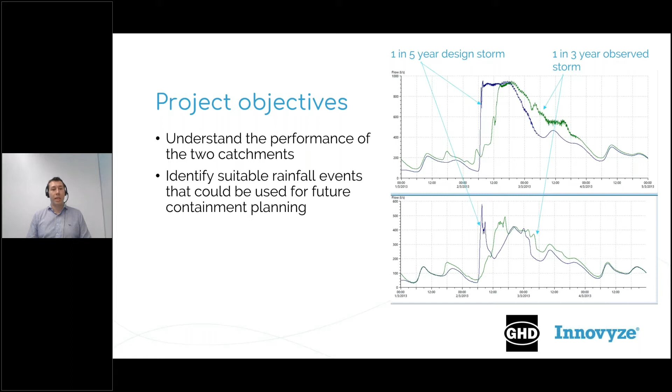And then secondly, we want to be able to identify suitable rainfall events that we can use for future containment planning. So that's like the master planning. So instead of using design storms, we can use real recorded storms that give a certain level of spilling and design our containment to those. Next.

So really at the core is the long time series model. The long time series is really the rainfall. And so what we were given for Brisbane was 30 years of rainfall data that Brisbane City Council had collected. At the outset of the project, we decided roughly 10 years would be a representative timeframe. So we looked at this data in the first 10 years of the 30-year record.

There weren't very many monitors operating. The data was quite sporadic, lots of drops, so we kind of had to discount that. The next 10 years was the millennium drought, so it's probably not that appropriate to run and test overflows against. So really that left us with the last 10 years, which was the period of 2008 to end of 2017.

And we analysed the rainfall across this 10-year period, and we pulled out each of the events. We did that using general thresholds, like a minimum of 10 mil in 12 hours, just to get all of the different events. And we decided that we would merge events that were in close proximity, say within 3 days of each other, into a single rainfall event.

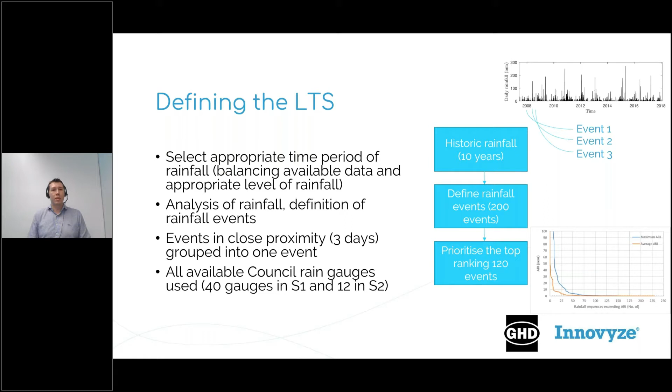So the process. What we're doing is we're relying on a calibrated hydraulic model. These models were calibrated to temporary flow data and temporary rainfall data. The calibration is about 3 years old. And what we did was we took those rainfall events that we just defined, and there were 120 of them, and we ran 120 simulations.

And we started each one up manually, as shown in the figure. And all of the initial conditions, so the groundwater, was set specific to the start of each rainfall event, obviously using the preceding rainfall event.

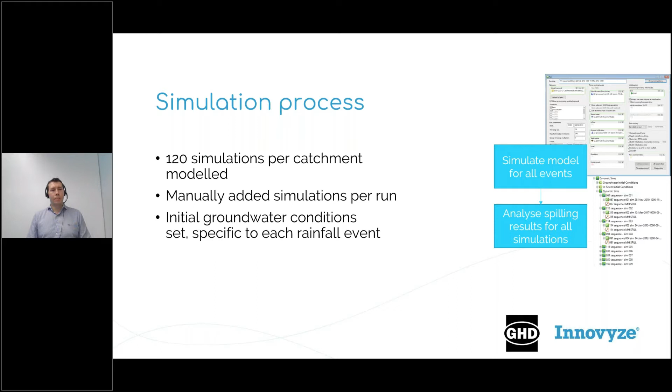So now that we've run the simulations, we've got results. The first thing to note is that for the S1 catchment, there was about 1 terabyte of result files and 0.5 terabyte for the S2 catchment. So firstly, what we can do is look at all of the assets that spill at any point over those 120 simulations. For the S1 catchment, it's about 650, and 530 for the S2 catchment.

And we excluded the small reticulation because when running large ARI rainfall events, it's not the most practical thing to include the reticulation. So with the results, we analysed it in 2 ways. We had the frequency of overflow per asset, and secondly, we had the ranking of the overflow that occurred over the whole catchment for a set period of time.

So the first piece of analysis is shown in the two images to the right. The top one, I've just pulled out an example asset. Each point on that graph in the top represents a spill. And they have various volumes of spilling and they occur at various times. So over the 10 years, which is our representative rainfall time period, this asset spilt 85 times.

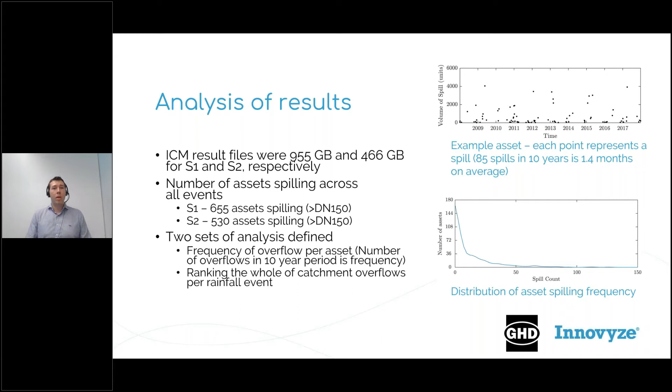So staying on this idea of how frequently assets actually spill, we can use that information to inform operations and get an idea of how the network performs. Next slide. So what we did is we calculated what the spill frequency was for every single asset and put it on a catchment map. And we put the sewer network pipes in the background, and it highlights where the really frequent spills are, where the points on the network that spill are.

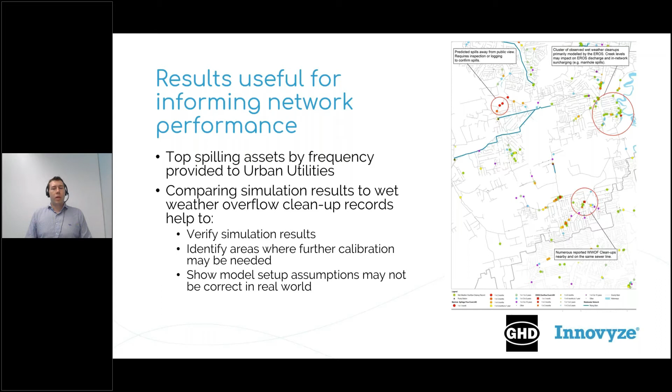So returning back to the second objective about choosing rainfall events for possible inclusion in master planning and containment simulations. What we had was the 120 simulations of data, and we can see all the spills that occur in them. Now, because some of these rainfall events are quite long and really include multiple rain bursts that create multiple overflow events, what we've done is we've taken those simulation results and we've split out the overflow events from within them.

And so the figure in the top right just gives an indication that was one simulation, but there are 2 rainfall events and 2 spills. So that's the hatched area. So we went through and did that for all 120 simulations, and obviously the number of overflow events was slightly more. And it's important to note that the time that this applies to is consistent over the whole network for an overflow event. So we're no longer looking at individual assets, we're looking at what happens at the network level.

And so what this does is, if we do that and we take the volume of spill from the entire network over that time range, we get a table, and we can rank that table. Largest spilling volume from the network as rank 1, and then descending down. And that's what the bottom figure shows us.

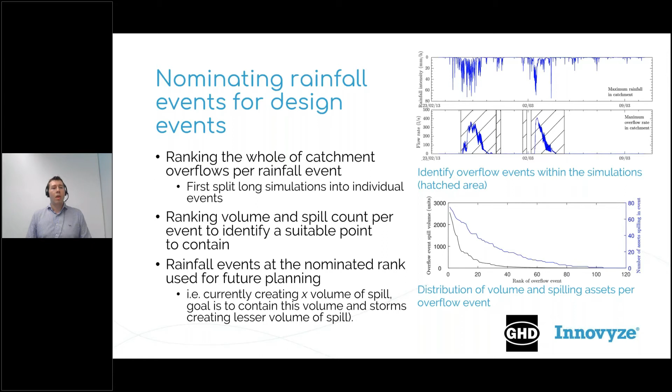So how we use this information. In the table down the bottom, I've just pulled out some representative rainfall events and the overflow event. So at the 3-month spill ARI, or the 40th ranked overflow event by volume, there's about 6,000 cubic meters spilling, and the rainfall depth is about 65 millimeters, and it's a half a year ARI, so 1 in 6 month rainfall ARI that's generating that volume of spill. And we've got different statistics for different spill recurrences.

And it's quite interesting to note the box plot in the top right hand corner. So these overflow ranks, we've ranked them, but the spatial distribution and the temporal distribution of the rainfall can be different because we're using real historic rainfall. We don't want to limit it down to one rainfall event. So we select a few either side. So for the 40th ranked event, we might select from rank 43 down to 37 and look at those rainfall events.

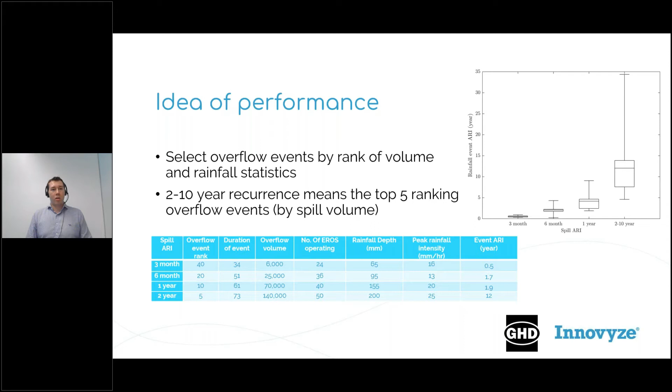Thanks, Nick. We've got some questions coming in, so we'll just take a couple minutes to answer the first couple questions. Nick, do you have a list of all the ARIs against all the rainfall events? Yep. So as part of the first part of this project, looking at all the events for the rainfall and splitting them out in terms of time, we calculated various statistics, and that included the ARI of the rainfall. And we did that for every single monitor as well, because obviously there's more than just one rain gauge within an event.

Okay, great. In terms of frequency and volume of spills, how do you compare the time series results from AR&R 87 to AR&R 2019? Do you have that off the top of your head? So we did not do that as part of this project. I did a small test just for fun, and at least in the response, it looks similar. But I haven't gone into it in enough depth to say.

Okay. One more. What assumptions and setup did you assume for boundary conditions and pump station operations? Yeah, so we purposefully made the decision at the outset of the project to run the calibrated model with, I guess, ideal conditions. Some of the pump stations are operator controlled in wet weather events, and they do funny things. So we made the decision that we would run it as it was designed to be run. And the idea there is if our model predicts X amount of spill, then if they run it in a less efficient way, it's only going to be worse. So it kind of gives the justification to fix other stuff first and then look at the network results.

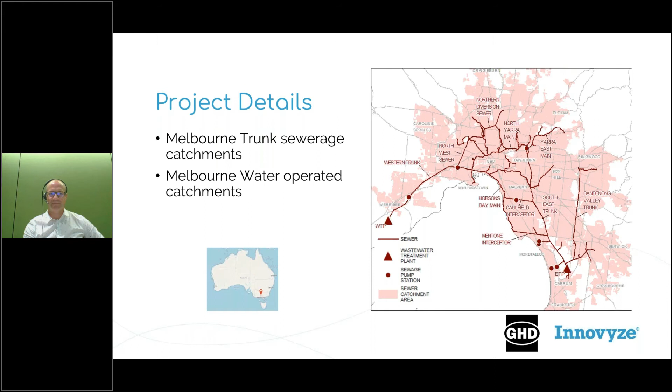So the objective of the project was to produce an events-based analysis and compare that with the time series that we're doing here. And the outputs of that would be to compare the treatment plant wet weather inflows with the event-based flows, and also the spill points and the spill volumes that we get throughout the system. Next.

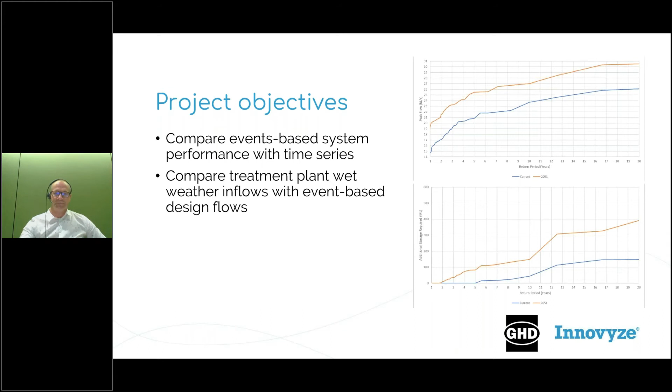So to define our long-term time series, we wanted to use 50 years worth of data, so going back to 1960. As Nick highlighted up in Brisbane, the older data wasn't quite as good. So we used Bureau of Meteorology daily records dating back to the 60s, and then Melbourne Water had records going back approximately 30 years. And so the data series was produced to generate 30-minute time steps for the data going back to the 1960s.

So there was data processing done on the information available from the combination of the Bureau gauges and the Melbourne Water gauges, and then the data from the Bureau records created 1,020 grid points across that Melbourne network. So if you've got 50 years of data with 1,020 grid points with half-hour intervals, you've got nearly 900 million data points.

So that was used for the system assessment, and then to apply the hydrology, we just used daily rainfall and evaporation, which was just on a daily process. So we used that as a single rainfall file within the model, whereas for the individual years we did 1 year at a time across the different decades. All right, next slide.

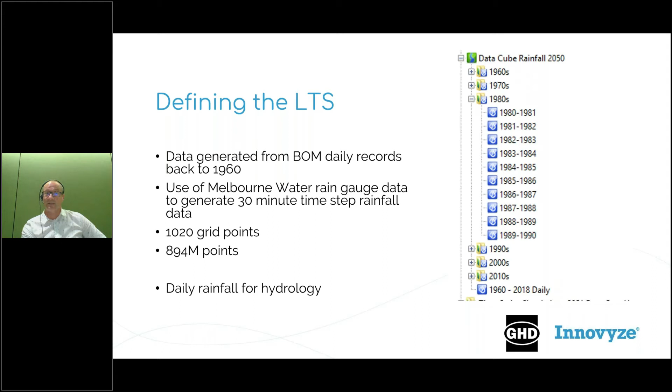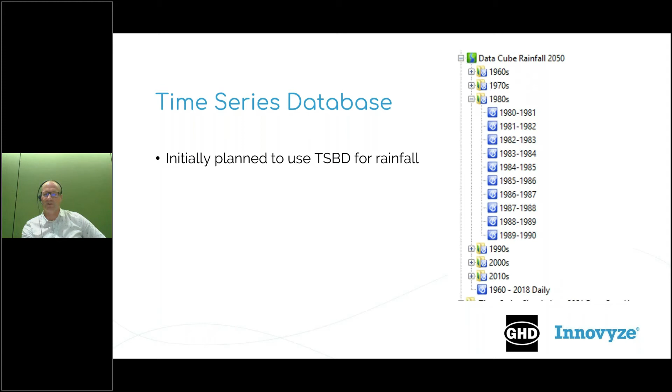So this was done a couple of years ago. We'd initially planned to use the time series database for all of this data, but at the time we couldn't quite get it to work as we'd wanted it to, and so we abandoned that idea and went with the more traditional importation of the rainfall files. Next.

Just back one. So we put the rainfall files in. As I mentioned earlier, there were 1,020 rainfall profiles, and so we needed to manually assign them to the subcatchments that we had within the model, and ditto with the evaporation profiles, of which we had about 6. And so that was the rainfall input into the model, and then we go to the next slide.

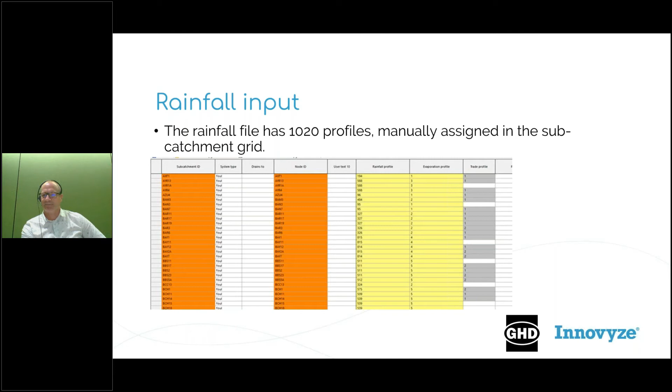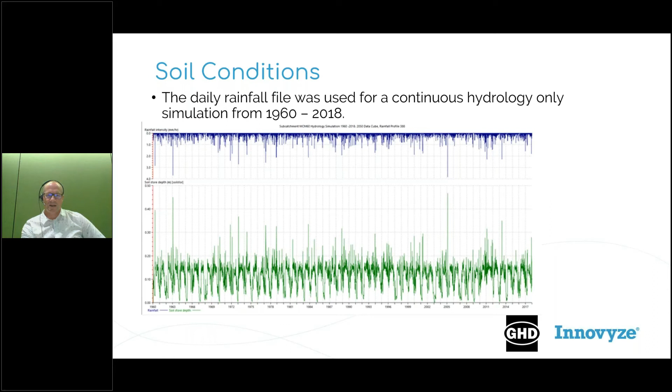And so to get our initial groundwater condition, we ran the daily rainfall file from 1960 to 2018 to generate the soil store depth throughout that whole time series of almost 50 years for each of the subcatchments, and then used that as the initial condition for each of the rainfall events that we used. Next.

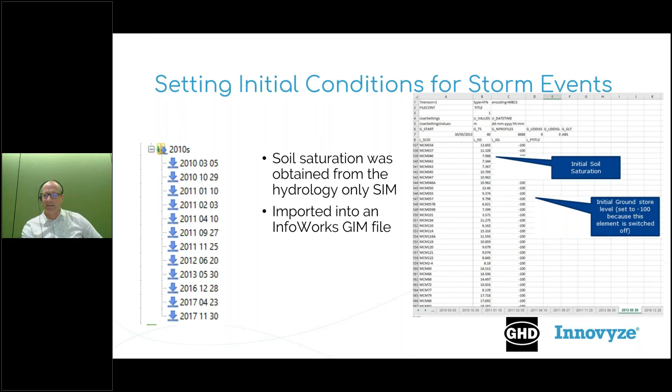And so the soil saturation, as I mentioned before, we used that 50-year hydrology file, and we went to the start point of each of the events that we wanted to look at. We extracted the results, processed the data, and then imported it into an InfoWorks groundwater infiltration module file for each of the events that we were going to look at. So that was the process that we used there. Obviously a lot of data processing, but it seemed to be the most efficient way at the time that we did it. Next.

And so in order to select the events, we had 50 years worth of data. And so initially we selected 70 events based on the rainfall depth from each event. So we thought we'd sort of start with that. So that was the starting point.

And for the 50 highest ranked events, spills were predicted at 2 of the known capacity constrained parts of the system. So that was the top 50 events from the 50 years, and then the next 20 events that we ran, spills were not predicted at those 2 known sites.

And so I think probably if you can crunch your numbers in your head, you'd probably sooner be walking along the creek in the rain in Melbourne than you would up in Brisbane. Next slide.

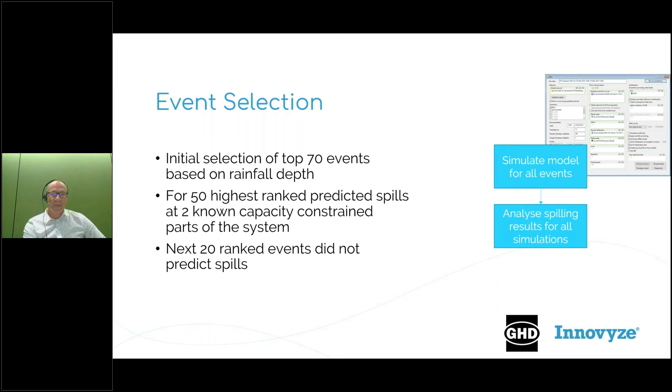And so then in order to check that data, we had a look at the last 25 years of ERS spill data, as well as the last 20 years of treatment plant inflow data for the 2 plants that operate in the Melbourne system. And what we found out was that there were some ERS spills that were not captured in those top 70 events. And so because of that, we changed our event selection criteria,

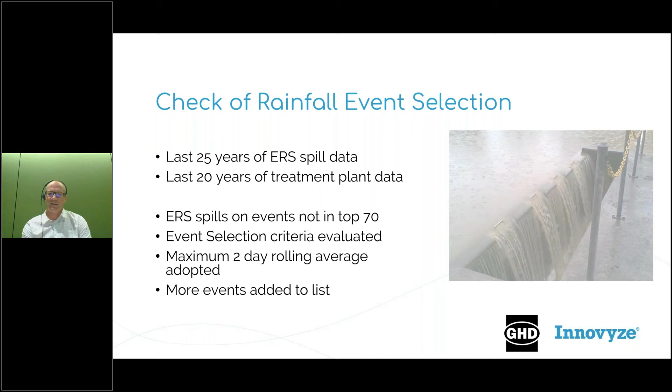because obviously there were some spills at some of the events that weren't on the highest amount of rain over the average of all the gauges that we had. And so we adopted a maximum 2-day rolling average for the rainfall depth across the gauges, and added some more events to the list. Next slide.

And so our criteria were to include our initial 70 largest events, and then because we had the ERS spill data for dates, we included those if they weren't already included in the top 70. We looked at the treatment plant inflows and got the peak flows from the top 30 events. And so if there were any high flow events at the treatment plants that weren't included in that top 70, we included those as well. And then any alternative storm that we identified, just as a sort of coverall.

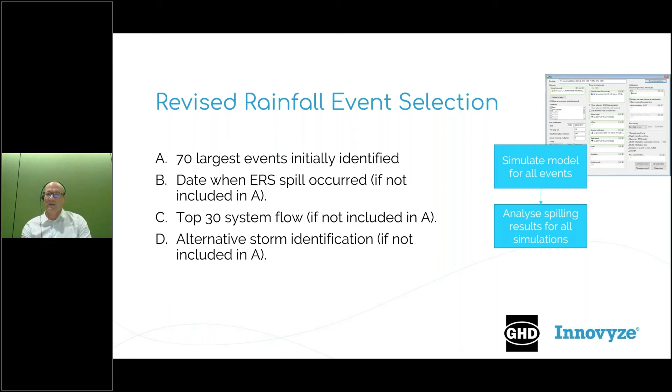So next slide. So we ended up with 92 events that we simulated. So we got those 92 events, and as I highlighted earlier, we generated 92 groundwater files, one for each of those, for the starting condition. And so we ran the events to analyze the spills.

So for each spill location, each storm was ranked based on the spill volume at each individual location, to determine the spill frequency and the spill volume with a 5-year return period, or a 1 in 5. And so in the example that we've got here, this location spilled for 12 events across the 50 years. So it gives a spill frequency of 4.17 years. And the spill volume with a 5-year return period is 66 kilolitres, which is the 10th one down there on the list.

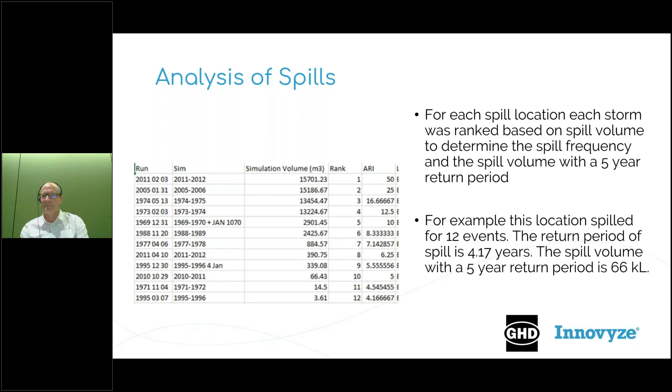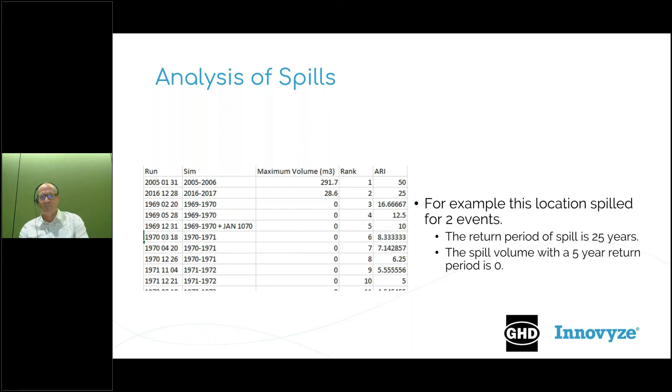So that was one point in the system that had spills and is known to have spills. Then we go to the next slide. And then an example of a second point within the system, which across the suite of storms that we looked at, this site spilled twice, so it's got a spill return period of 25 years, and therefore the spill volume with a 5-year return period is 0, which would be the 10th ranked storm across the suite. So we just go to the next slide.

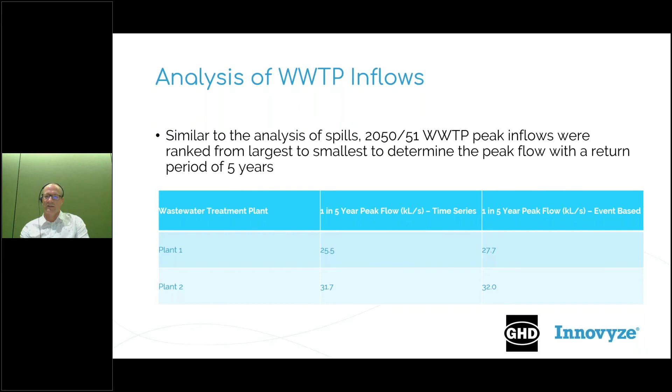All right, next slide. Yep, I think that's it. So that's a bit of a summary of quite a lot of work, and I've just given you a bit of a snapshot of what we did and what some of the outcomes were.

That's a substantial project. We've had a few more questions come in. Jonathan, could you explain the grid rainfall data method, and is it available for modeling like calibration? So the grid method. We didn't actually produce that grid method ourselves. That was done by others from the Bureau rainfall, and it was then processed down, as I mentioned earlier, from the daily records using some of the tipping bucket information to produce half-hourly intervals.

So I suppose a key thing to point out there is that when you're going down to only half-hour timing intervals on a smaller network, which includes your retic and stuff, your half-hour time increment might not be as appropriate to use for a shorter duration event. So there could be some limitations on that one. We didn't produce that data ourselves, so I don't know whether it would be available for general use, but I probably wouldn't use it as a starting point for calibration.

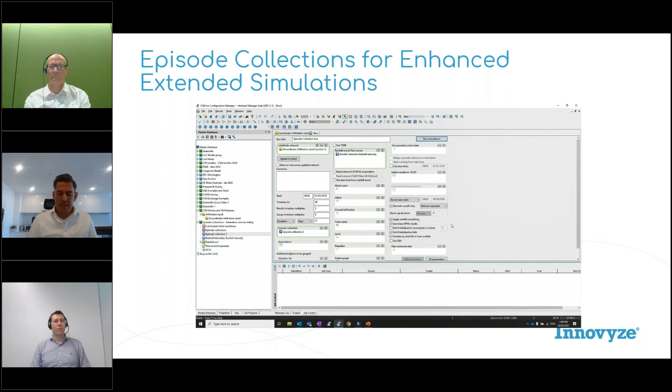So I'm going to close out of the episode collection, and we're going to create a new simulation. Call it episode collection simulation or run. Drag and drop your episode collection that we just created into your run group. And then pay attention over here. We adjust the simulate runoff only between episodes. So when you're simulating, the software is automatically going to differentiate the hydraulics from when you want runoff only between your particular events.

Kick off the simulation. This is occurring on my machine. As we know, we could use distributed computing to offload your sims to a high-spec server, which you'll want to do when you're crunching simulations of this kind. And then you can see it's been separated out within the run group. The RO represents runoff only, and then the separate runs are where the hydraulics are occurring. So we'll just let the simulations finish up.

So again, within the episode collections, you can reference individual episodes as well as apply different hydrologies. So you can use a warm-up of a defined period, the full hydrology for the entire run, hydrology between the episodes, or no hydrology as well.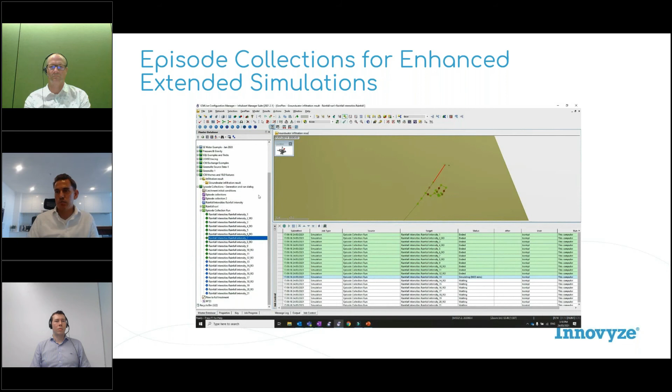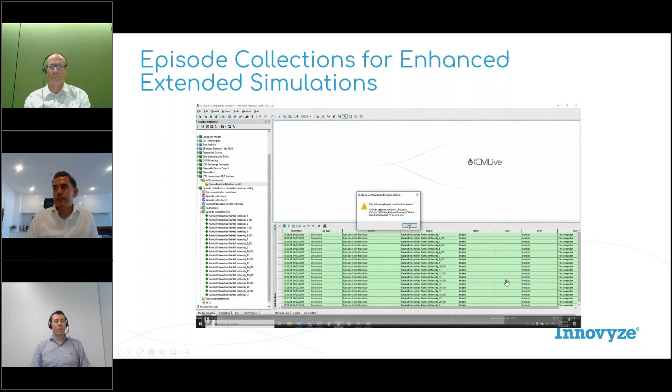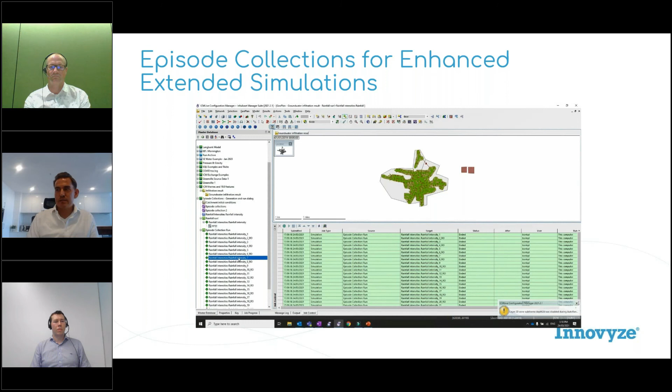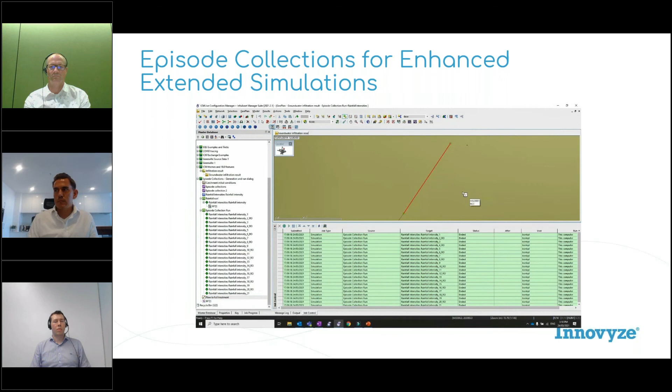And then once those sims are created, we can go into the model results. And I'm going to select a subset of the total run. So this will plot a result of that original location. And then instead of plotting the entire sequence, this is just demonstrating that that subset was runoff on either side, but where there was no hydraulics occurring.

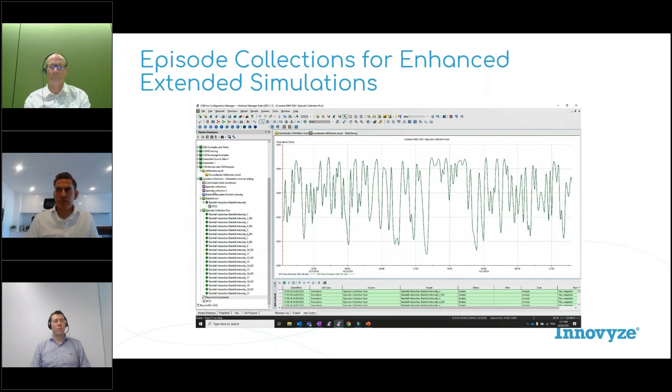So you can see where the exceedance was happening on that 0.04 cubic meters per second. But the software has represented that, and it's done it through various ways, generating the start and end times of your episode collections.

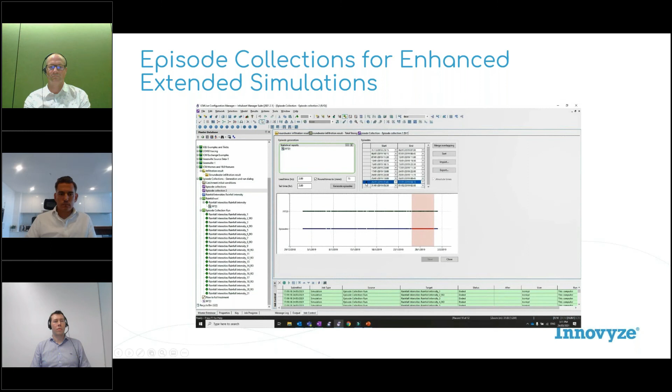So the second major tool that we've talked a fair amount about, if you're talking to anybody from Innovyze with regards to sewer modeling, is the time series database. And it's applicable to these projects because of the long time series data, the large data files, and the multiple data feeds. So as we've seen with Jonathan's particular project, we have an example of 1,020 rainfall grid points that you could potentially want to import.

So we have examples with TSDB where 1,000 data points have been linked directly to that time series database. So it's a technology that underpins ICM Live, but it's available to you in your planning models as well in the InfoWorks ICM suite. And it allows you to connect directly to your SCADA data. So this is just showing how you can map directly to the data itself in a live fashion.

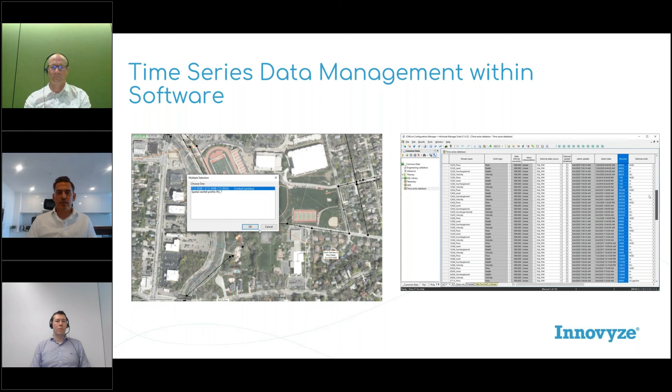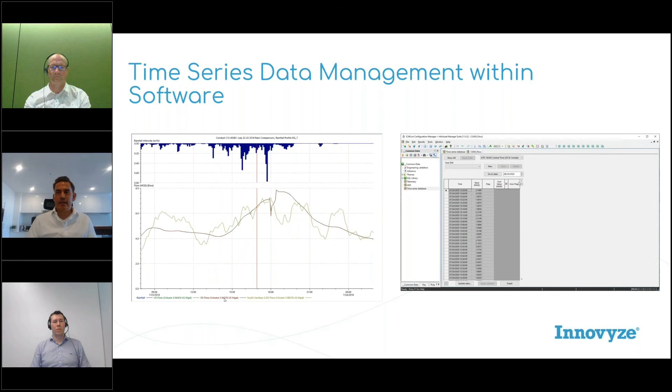And then on the right side here, when we're dealing with larger data sets, it helps to have that actual data connection. So we can see hundreds of streams or data stream names that have been linked and then you're automatically able to map it in. So when you're dealing with data sets of this size, it's quite beneficial to be able to map them and have them at your disposal. And again, this helps you reduce errors, save time, and eliminate manual steps when you're dealing with your time series data for these particular project types.

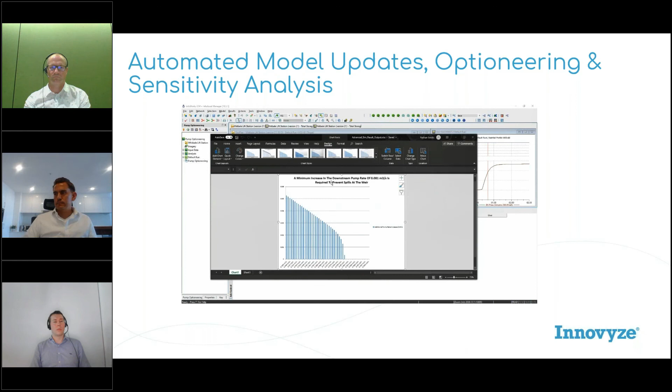So it's just producing results. And then here it's automatically generated them. The results are going to be available in my model. Click on the one, it's 58 liters per second, and that's the optimal scenario, and then I can run my analysis from there. So that's ICM Exchange, the time series database, and the episode collections.

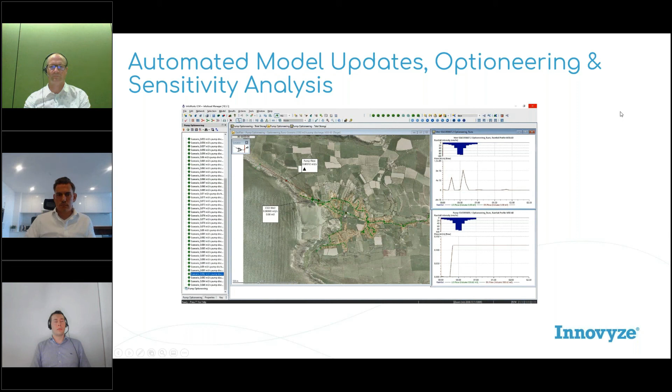Okay, we have a few minutes for a few more questions. Okay, when you have severe rainfall events, as reported in the news and what we've experienced in the planning world, will this week's events be looked at as an anomaly, or do you see this as a driver for more studies of projects of this nature? Do you see this expediting projects like this, or is it just considered, we anticipate this statistically?

Well, I would say, I mean, the people on the news say it's 1 in 100. The hydrologists will probably come up with a different number, but I think everyone can recognise that it's a pretty extreme event, and it's not likely to happen that often. I can't see any water corporations planning their systems to cope with situations like this.

That being said, there are sort of, off the AR&R 2019, some indications of climate change scenarios that you can look at for the future. So you might just tweak your design storms a little bit to incorporate, maybe your 1% AEPs now versus in 20 years might be a little bit different, so you might change them up a bit.